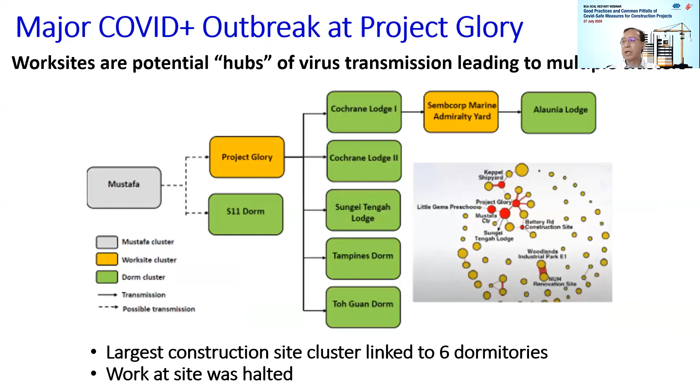As the BE sector restarts, we are reminded of the COVID risk posed by the workers' accommodation and worksite arrangement amongst various project parties. What happened at Project Glory is a case in point. At that time, when it became the largest construction site cluster, it was linked to 6 dormitories.

At this point in time, there is no vaccine or medicine for COVID, unfortunately. The only real protection is to implement safe management measures, SMM in short, and to contain any spread quickly when it happens. How well SMM are observed will be key to avoiding COVID outbreaks at work sites.

BCA has set up an audit and inspection team to check on effective implementation of the new measures at work sites and supply work premises, and to learn and share good practices quickly.

The key objectives are ensuring safe access, basically allowing only healthy and approved workers to work at site; achieving safe distancing by enforcing safe distancing, segregation and cohorting measures at work site; and providing containment by ensuring that COVID-positive and quarantine workers are isolated swiftly.

The builder and his subcontractors and workers play the most crucial role in keeping their worksite COVID-free. The key things for project parties to look out for are implementing a robust entry control system by implementing Safe Entry NRIC version, only allowing approved workers to enter the site, and ensuring that subcontractors and visitors do not mix with workers on site.

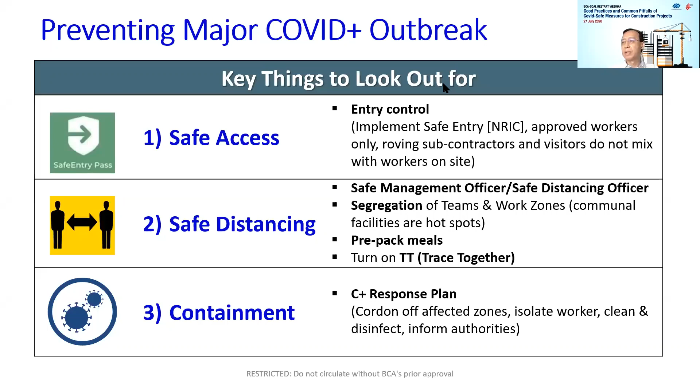Establishing a COVID-positive response plan which covers basically the following steps: cordoning off affected zones, isolating the workers, cleaning and disinfecting the affected zones, and informing relevant authorities.

In another more recent case, there was an outbreak caused by mixing of workers across work zones, common facilities, company transportations, and workers' residence. 6 COVID cases were first confirmed among an 8-man team working in the middle work zones of the project site. This later led to 356 close contact workers being quarantined.

Investigation shows that the main causes of the outbreak were workers from different work zones sharing common lunch and rest areas. Workers across the 3 work zones took the same company transportation to workers' residence, and workers from different work zones shared common residence and had social interaction.

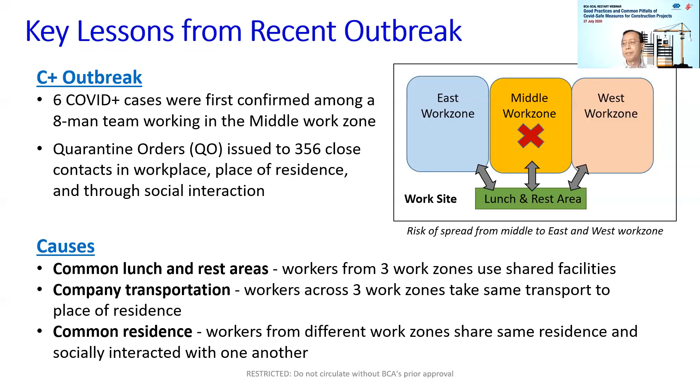The outbreak had a great impact on the project. MOH subsequently served a stop work order. The entire work site was closed and had to carry out thorough disinfection. The entire block of workers' residence was also locked down, with 77 workers conveyed to government quarantine facilities and 144 quarantined in situ.

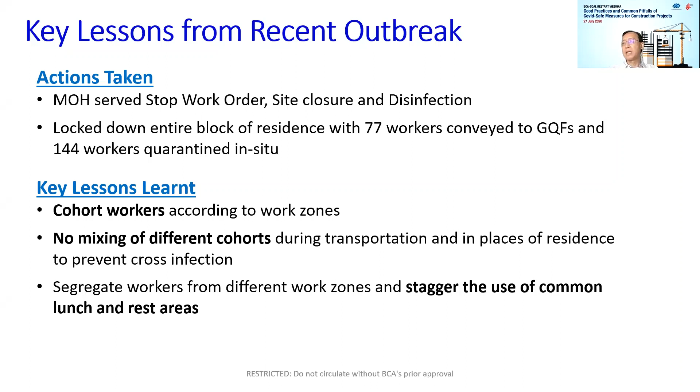The key lessons learned from this project are: firstly, builders should cohort workers according to work zones. There should not be any mixing of different cohorts during transportation and in places of residence to prevent cross-infection. Builders should segregate workers from different work zones and stagger the use of common lunch and rest areas.

Now I'll share on BCA's key audit findings from inspections carried out at work sites and supply work premises over the last 2 months.

Mismatch in entry records with BCA's approved whitelist; sites not installing the Safe Entry NRIC version; missing safe management measures monitoring plan on site; inadequate number of safe management officers and safe distancing officers found on site; sites not providing meals in individually packed form; and no isolated sick bays provided on site.

I will cover these non-compliances in more detail in my subsequent slides.

On mismatch in sites' entry records with BCA's approved whitelist, the main reasons are: SMO did not realize that workers were rejected; builders just submitted the updated personnel list to BCA, but it hasn't been approved; or builders added manpower to site to cope with the workers' shortfall, but did not actually submit the new list to BCA; builders submitted the new manpower to BCA, but did not include the previous approved list of personnel; and SMO did not know that they themselves and essential workers—Singaporeans, PRs, subcons—have to be included in the list.

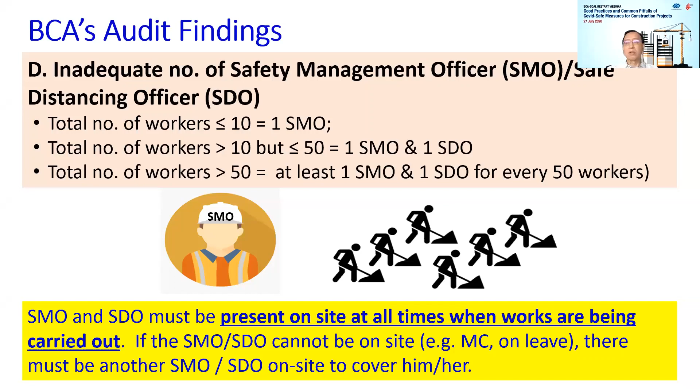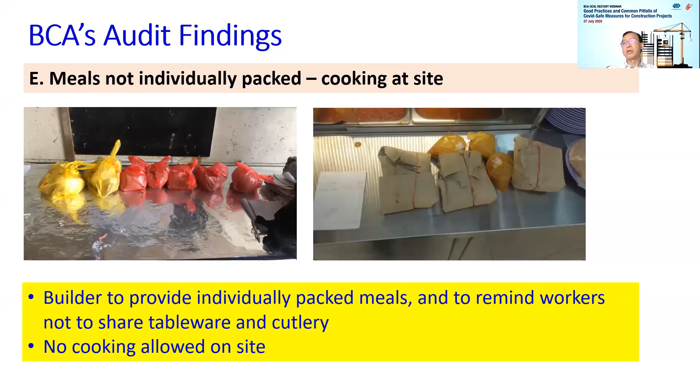Another key finding is the cooking of meals at site, mainly at sites with construction temporary quarters or temporary living quarters. Now, cooking is not allowed on site to ensure workers do not share meals, which increases the risk of contamination and spread of the virus.

The last key finding is the non-provision of a fully enclosed sick bay for the isolation of suspected COVID personnel from the healthy workers. Here are two examples of improper sick bays which do not serve the intent of isolating suspected C+ cases that we found during our audit.

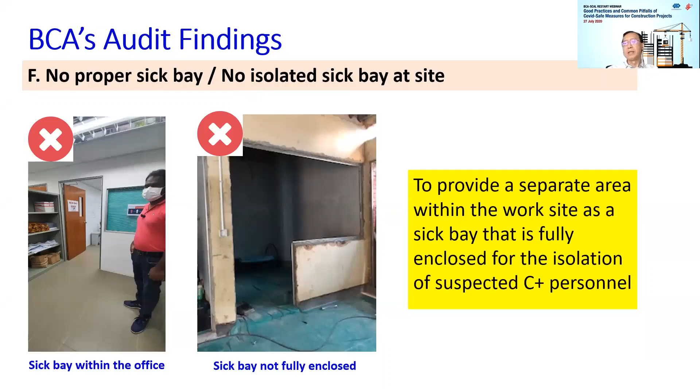Now, sites should only allow workers whose access code is green to work. All site personnel should install the latest TraceTogether app on their mobile devices, which will facilitate traceability in the event of a COVID-positive case. The Bluetooth has to be switched on at all times for TraceTogether to work.

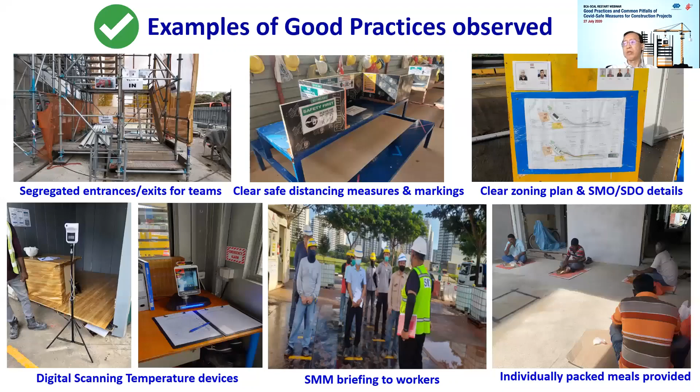Other good practices observed during site inspections include having staggered work hours and rest breaks to prevent mixing, SMOs using smart devices to track compliance on SMM, sites installing BCA feedback posters for whistleblowers to report SMM non-compliances, clear display of work zones to prevent mixing, sites using SafeEntry with NRIC to track entry of site personnel, and providing visual identifiers such as colored armbands and wristbands to prevent mixing.

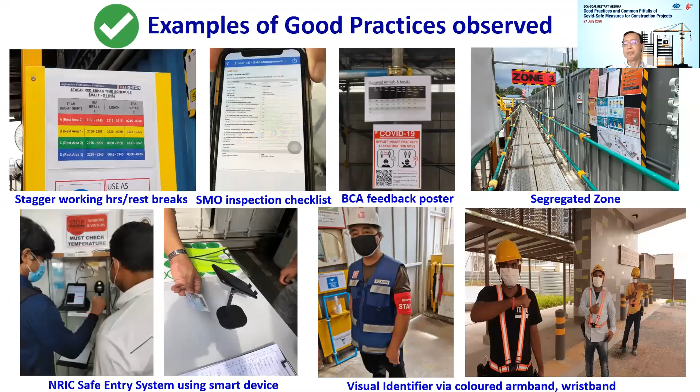Next, I'll share some common non-compliances observed at sites. Here are some images of non-compliances found during our site inspections, which are areas for improvement. You can see workers blatantly not wearing masks, and workers with access code red being allowed to enter the site. Another example is providing improper sick bays, which will not serve the intent of isolating COVID-positive or suspected cases. And cooking in a TLQ, which greatly increases the risk of contamination when workers share food. BCA will take enforcement actions against work sites that do not conform to SMM requirements.

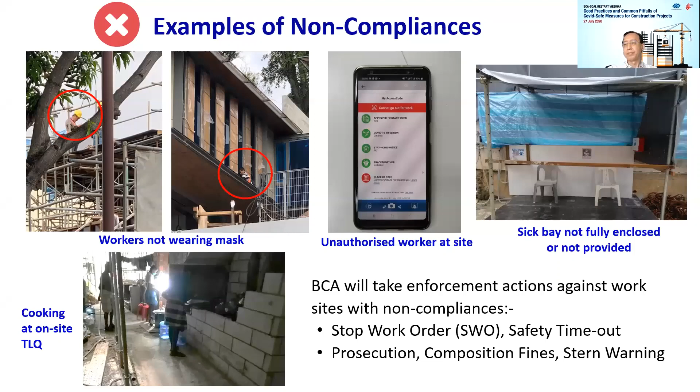Okay, with that, I've come to an end of my sharing. Thank you.

Thank you, Mr. Goh. Next, Mr. Goh Poh Khim, Executive Director of Koh Brothers Group, will be presenting one of their projects—construction of cut and cover tunnels at Marina Bay area for Circle Line 6—on their project planning and implementation of effective safe management measures on site. Mr. Goh, please.

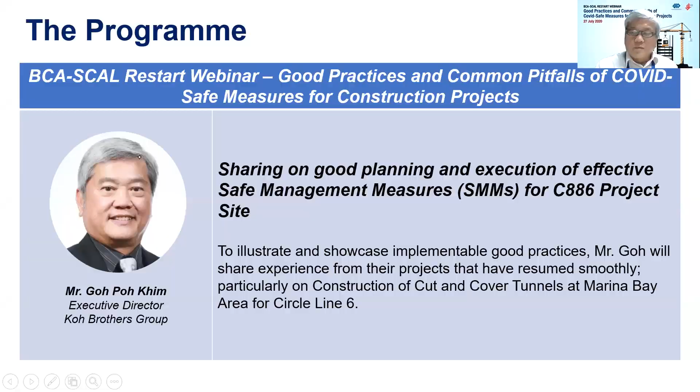Sharing on planning and execution of effective SMM on the C886 project site. A little bit on the project info and what guided us in our planning, the planned activities for each phase that we are doing, and of course the safe management plan on worksite, workforce, safe accommodation and transport, safe transportation, and the challenges ahead.

Background of the project: C886, construction of cut and cover tunnel at Marina Bay area for Circle Line 6. Our client is the Land Transport Authority. Location is at Marina Bay area. Contract sum is 225 million, and the contract period is up to 30th April 2025. The scope of work involves a tunnel of 832 meters, one escape building, ERSS system, diaphragm wall, DSMs, alternative strut and excavation, and alternative partial top-down construction. Others include obstruction removal, traffic diversion, decking, and utilities, etc.

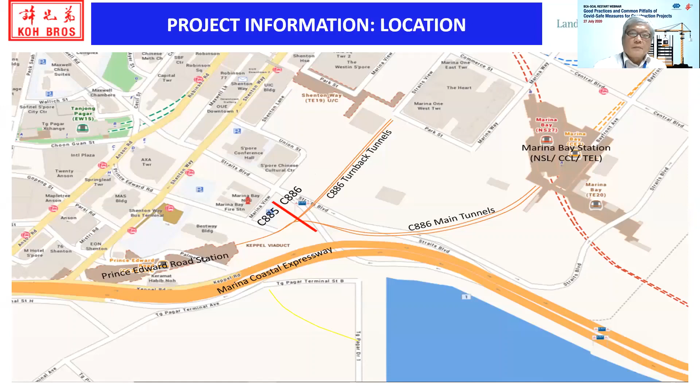The project location shows the turnback tunnel and the main tunnel here. Prominent landmarks include Marina Bay Fire Station on the left and Singapore Conference Hall nearby. The scope of works: diaphragm wall for the main tunnel and the turnback tunnel, about 2.2 kilometers, with excavation of 244,000 cubic meters. We have struts, RC works, and underground obstruction removal forming a significant portion of the scope of works.

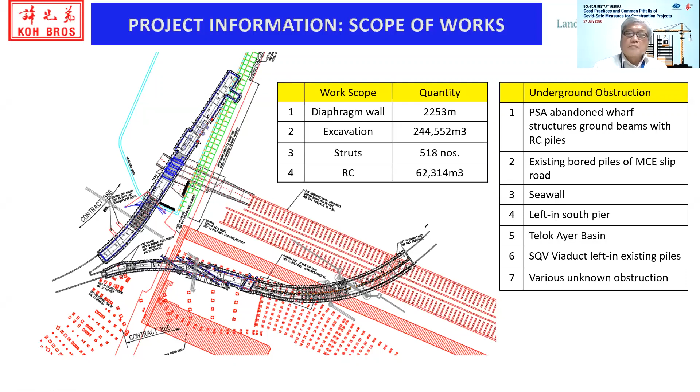Now our planning guide, what did we do? With the COVID pandemic in the background, we started off with a small step. We wanted to put a foot in the door first.

Pre-COVID workforce, we had 480 pax. Current approval is about 150, 30% of the original. Understanding the situation and various government advisories, we need to negotiate our way forward, understand how to move, how to adapt to the new normal. So we had a lot of guidance from client, LTA, and we pre-consulted with BCA for 2 weeks before submission.

Currently, we restarted and are applying to increase our workforce. We planned in phases, starting in phase 1 with a small step. We only had 2 teams of D-wall construction going on out of about 5 teams on site, for soil disposal and rebar fabrication. We used workers from our GSF as well as workers from TLQ. So it's a very small force. This is currently what we are doing now, the current stage.

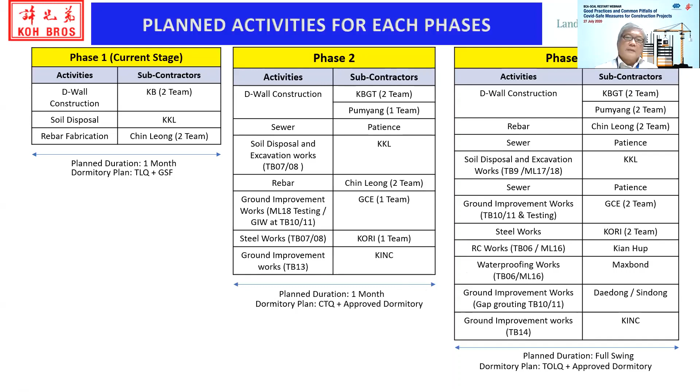And TOLQ, which is what we are applying for now. We have all the clearances already from all the agencies. We are just waiting for SLA to give us approval to move in. I think preferably we're trying to move in on the 1st of August. The TOLQ will house a capacity of 270 pax, and it is near the site, walking distance away.

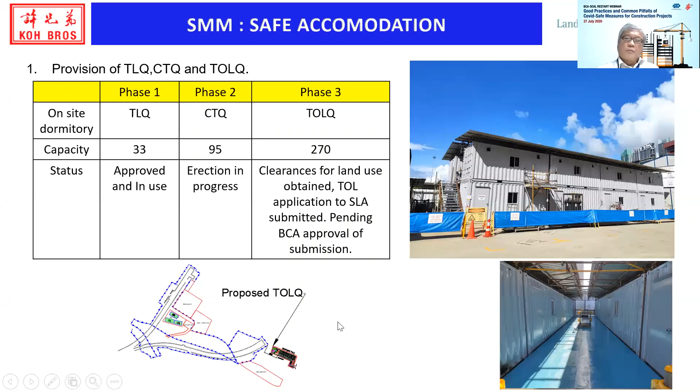Workers, like what Mr. Goh said earlier, in the same work zones must be segregated. Each team stays together within their own team. Earlier on, BCA allowed only 5 dormitories for workers, required for applications with more than 100 workers.

But now recently, with a circular on the 21st of July, there's no cap on the number of workers, but there is a limit of a maximum of 10 dormitory addresses. So this is what we are working on again now.

If you look at the table below, the workers' accommodation currently shows where our workers are: at GSF, Redhill Close, our TLQ, and fortunately we have our own FCD at G&W, and our subcontractors have their FCD also cleared. The table on the right shows Redhill Close, how we segregated the different teams into different rooms.

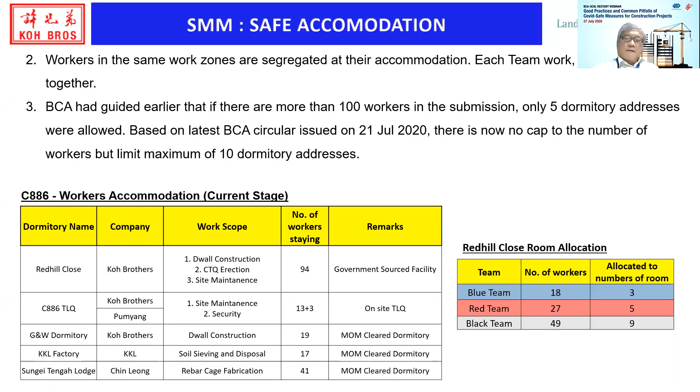Safe transportation, like what Mr. Goh said earlier, involves staggered arrival and departure times for each work zone. We have divided our workers into a few work zones, and the arrival of each work zone is at different locations.

So we use buses and lorries for our transportation. Each work zone will have their own separate transport, and transportation of our SP holders is by company van. Daily records of our transport arrangements are kept for contact tracing purposes.

Now, if you look at the transportation plan below, we have different colored teams for workers in day and night shifts. For the red day shift, 17 workers in a 40-seater bus. For the blue day shift, 11 workers also on a 40-seater bus. It's not up to capacity, but we have no choice—we have to segregate them in order to meet the COVID-safe measures implemented on site.

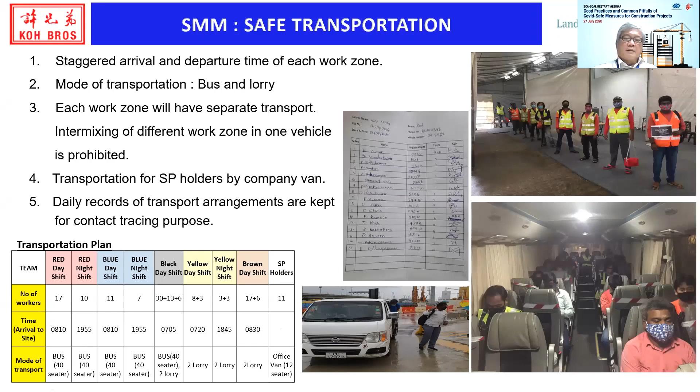The work site is divided into zones, and each zone is divided into teams. In zone B, we have D-wall construction with 2 teams, blue team and gray team. In zone C, we have rebar and soil disposal, handled by 2 different companies: Chin Leong for rebar, and KKL for soil disposal.

Now we are trying to increase our workforce with sewer coming in, strengthen or increase our workforce for D-wall construction, and increase activities for ground improvement as we approach.

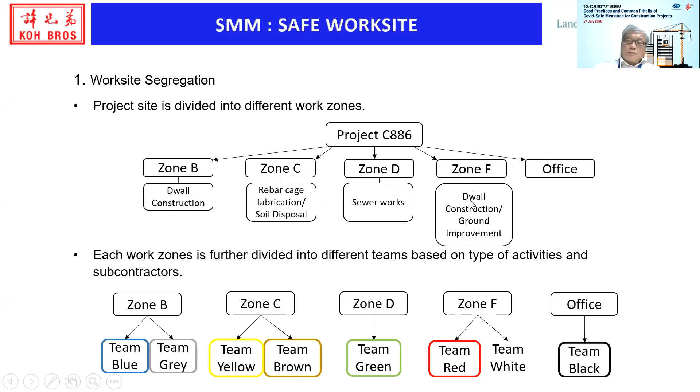This is how the work site looks when we segregated it between zones and color teams. They are all demarcated very clearly and separated on site by barriers so that there's no cross-contamination between teams in each zone. We have 3 drop-off points down here.

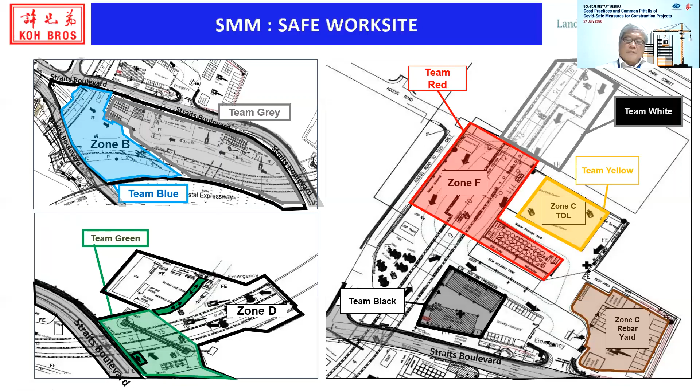Facilities provided at each work zone include a dedicated rest area, water point, toilets, and containers for site staff and supervisory staff, who can only stay in their respective zone and are not allowed back into the office area. We also have sick bay and isolated room containers prepared for each different work zone in case of emergencies.

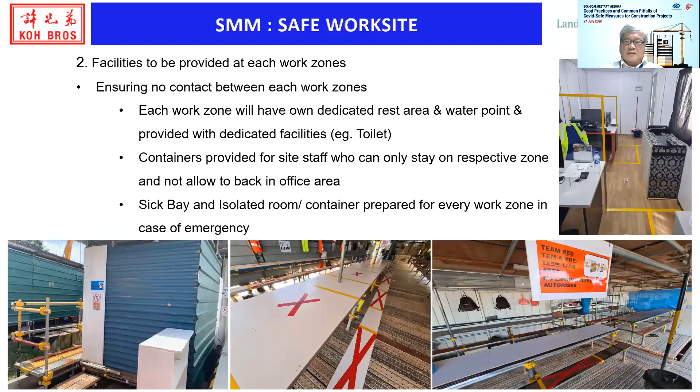For entry and exit, we have a safe entry NRIC system at every entrance of the work site. Like I said, we have 3 drop-off zones, so we have 3 NRIC systems for safe entry.

Additionally, we have QR codes to record workers' health before entering the site and before entering different work zones. Before they enter a work zone, they scan their QR codes so they can be monitored as to which work zone they are allowed in. Every zone is also provided with sanitizers and insect repellent.

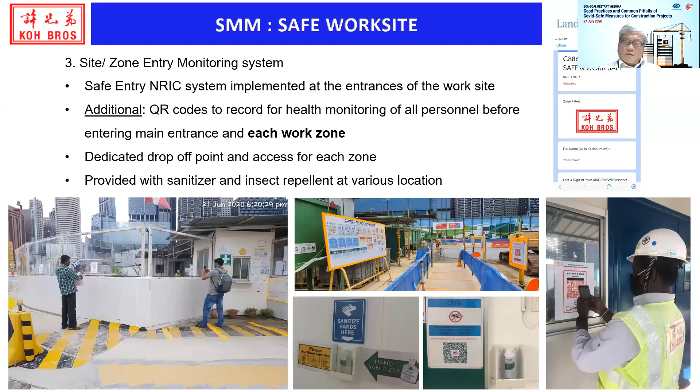As for how we identify the teams: our vests come in different colors - red, yellow, black, green. This is how we identify the teams on site and the work zone they work in. So if red is in one zone, they will not cross into another zone. We also identify them by their helmets.

Transient daily workers are those staying outside the work site when they come in. We differentiate workers staying in TLQ by stripes on site.

We have staggered working hours, lunch breaks, and rest hours for the workers in each zone and the different teams involved, plus pre-packed delivery of food. Ignore this guy, he's the driver.

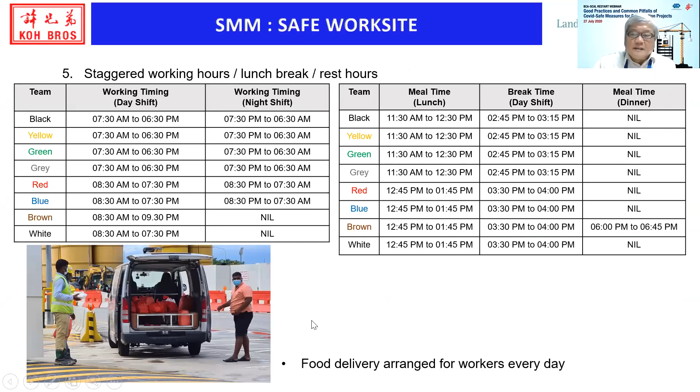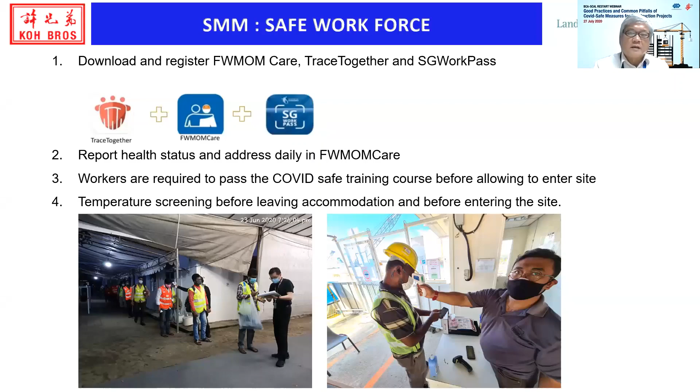Now the challenges that we face. We were given approval for restart on the 27th of May.

After consultation with BCA and guidance from our client LTA, approval was given on the 15th of June for resumption of work on site once COVID-safe compliance measures were submitted and approved.

I believe some of us have had this experience before - workers' access codes were still red and not green. Finally, 5 days later, we turned green. Everyone was relieved and work got started.

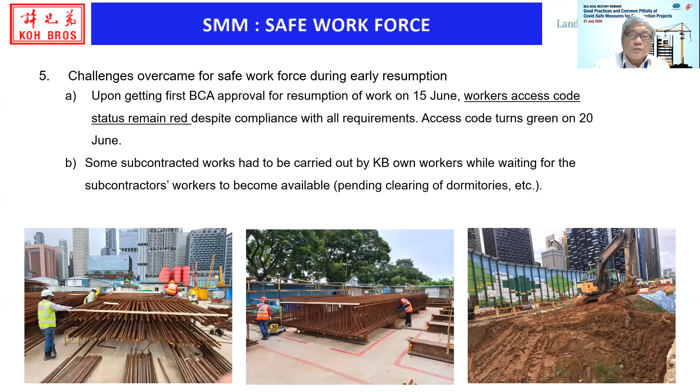Some subcontracted works had to be carried out on our own while waiting for the subcontractors' workers to become available, pending the clearing of their dormitories. I think with this one we have no choice but to act fast.

Our SMOs and SDOs are identified with armbands, clearly identifiable, giving daily reminders to workers on safe management measures in pre-task talks, just like our toolbox meeting when we talk about safety. We remind workers on safe distancing, maintaining good hygiene, washing hands, temperature reporting, MOM Care, and to report to their immediate supervisor when sick or unwell.

This is very important. We have 2 SMOs on site, 8 work zones, a current workforce of 156, and 8 SDOs on site.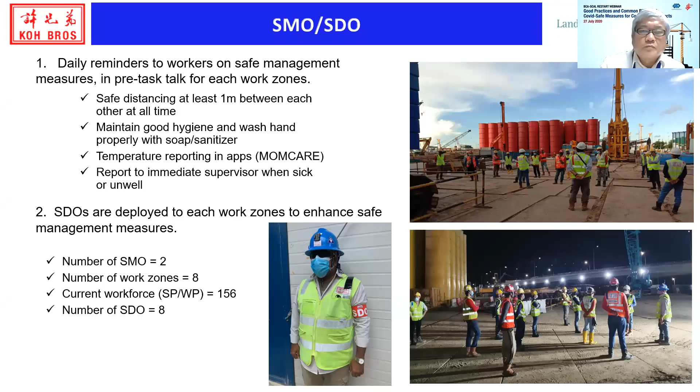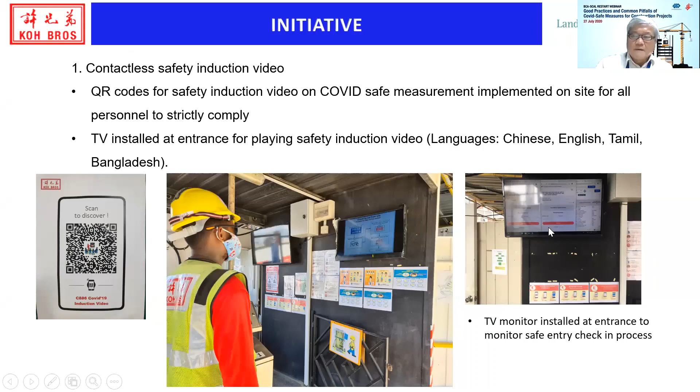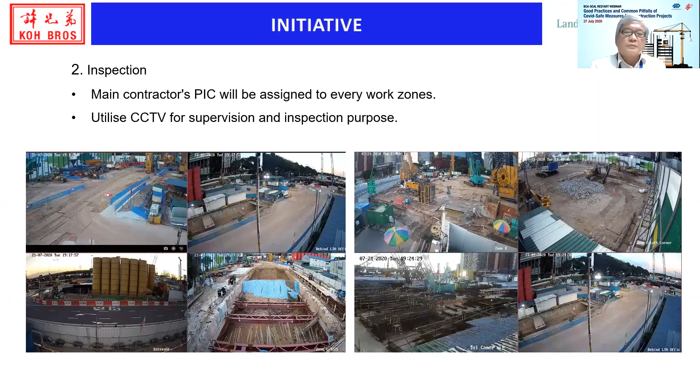Inspection - we have PICs assigned to every work zone. We utilize CCTV for supervision and inspection for COVID safe measures - no bunching, no crowding, no safe distancing violations are being observed. This is what we are doing now. Temperature screening, blood oxygen, and heart rate monitoring for TLQ workers. This is also quite common in many sites now.

Now the challenges ahead. Although we could start, the process is still very slow. Koh Brothers has started physical work at 6 of 7 projects. Productivity has dropped to only about 20% of pre-COVID levels. We're trying to adapt and adjust to the new normal. Increased cost and time due to additional COVID measures and the drop in productivity. It's just a long and winding road ahead.

It's unprecedented and uncharted waters ahead. We need to work with our clients, stay focused, engage with authorities, BCA and SCAL, to negotiate our way forward and adapt and adjust to the new normal. Hopefully, like I said, hopefully we will get back to pre-COVID levels soon. And it's just a hope. Thank you and stay safe.

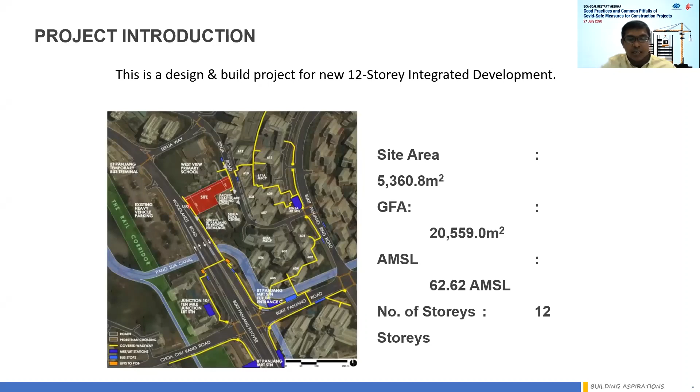Let me start by introducing the project. It is a design and build of a 12-story integrated development at Woodlands Road. For this project, the main difficulty faced was the manpower needed to restart, as most of the workers are housed in dormitories that are under isolation or COVID clusters. Also, unlike some typical work sites where there are TLQs in their premises, this project didn't have that privilege, which made it tough for the site to restart.

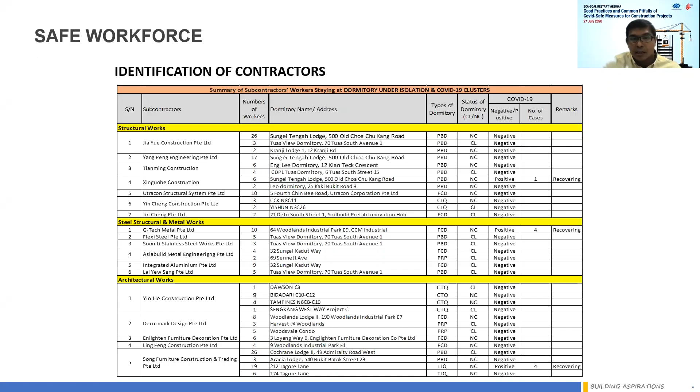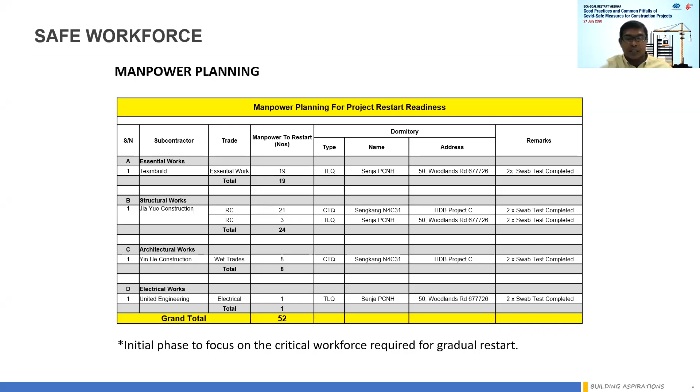Therefore, the project team had to thoroughly plan and identify the contractors and their housing accommodations, and also construct a TLQ within the premises in order to gradually start. The site team put in weeks of working and planning closely with our subcontractors to ensure proper cohorting at their housing locations. From this, we were able to identify the critical works required for gradual restart.

After the gradual restart planning and identifying the critical workforce required, the next step is the pre-screen requirements as part of the safe management measures implementation at the site. Let me share a short video of the safe entry process. Please enjoy the video.

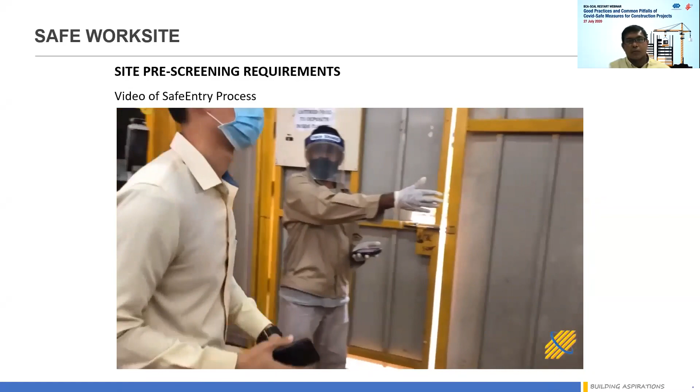Next, everyone entering the site is required to attend the COVID-safe induction course, where they are briefed on the in-house rules and regulations - for example, not to share food, not to enter unauthorized areas, worker segregation, and the work allocation plan, where they do not cross into other work zones and intermix.

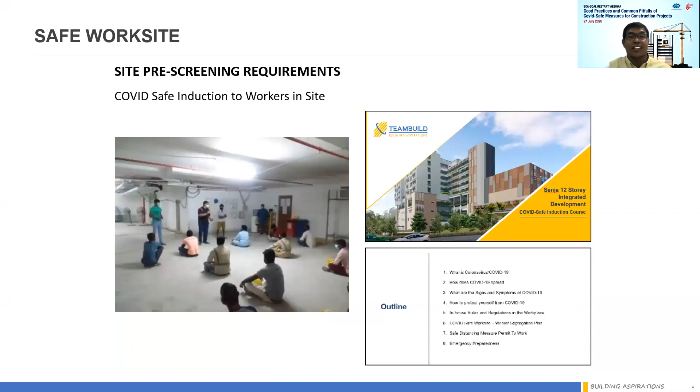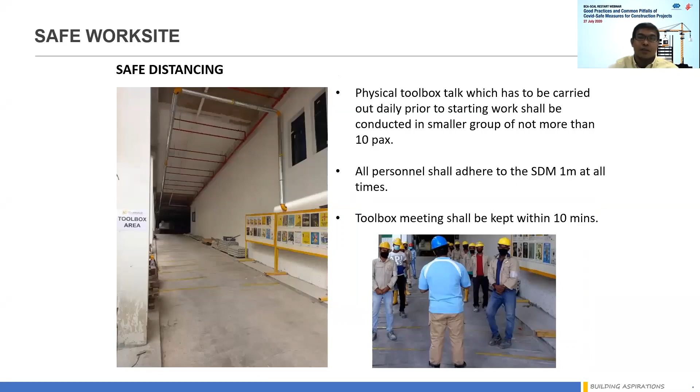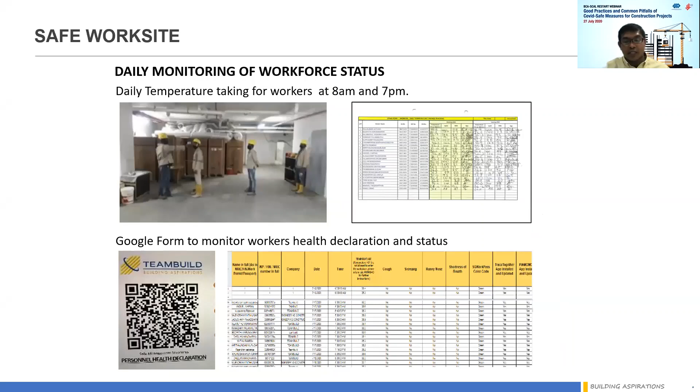Toolbox meeting areas are allocated and meetings are conducted in smaller groups of 10 persons, capped within 10 minutes. Daily monitoring of workers' temperature is recorded at 8 a.m. and 7 p.m. respectively. Google Forms are also implemented in individual TLQ rooms, where workers' temperature is recorded along with whether they are feeling unwell. This information can be retrieved instantly online.

Visitors entering the site are also required to complete a declaration. Details required are company name, purpose of visit, and whether they have been overseas or come in close contact with anyone showing COVID symptoms. All these records can also be retrieved instantly and monitored daily.

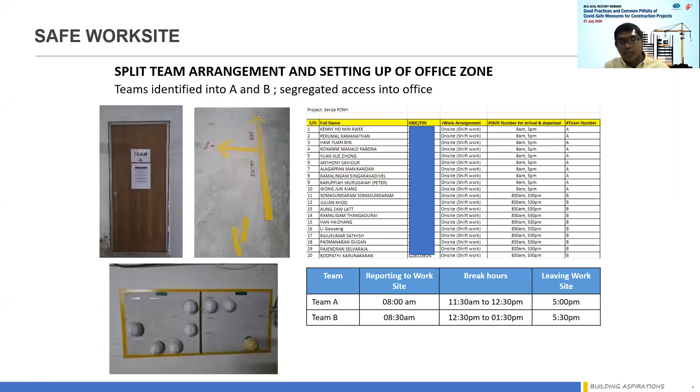As part of SMM implementation, site teams are also split into two teams, Team A and B, with allocated reporting times, meal times, and leaving times, and separated office entrances. To prevent intermixing of different trades, trades are given different colored armbands with their company name. Access is also segregated - for example, the architectural trade uses the stairs, while the structural trade uses the PM hoist.

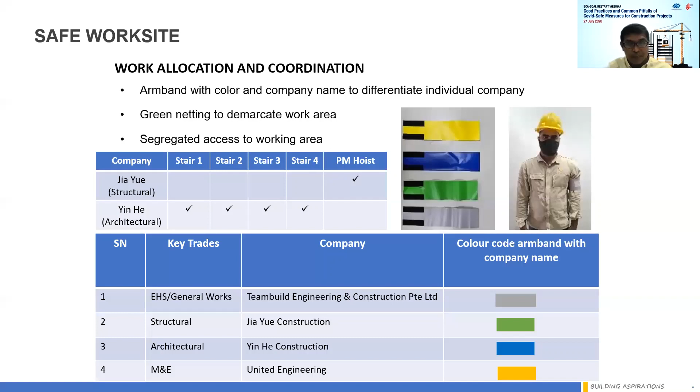For this project, I've also implemented a permit to work as part of the safe management measures, where the SDOs from different trades are required to fill up a simple Google form on top of the pre-work allocation planning done the day before.

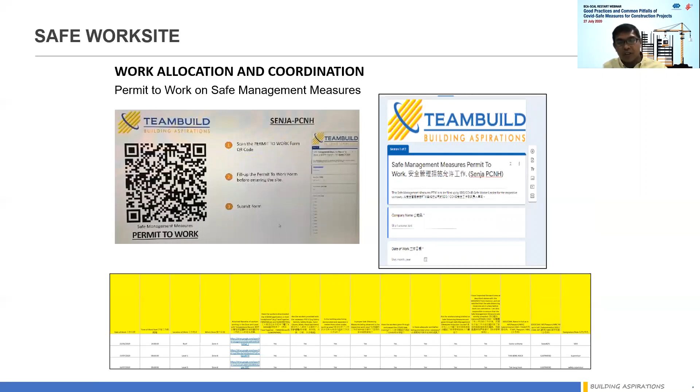So what is this permit to work system, and how does it help in monitoring? Some critical questions required in the permit to work include location of work, work zone, company name, and the name list of workers working in that particular location. This makes monitoring easier as it can be retrieved just from your mobile phone, and also helps identify and ensure that the correct team of workers are working in the correct locations.

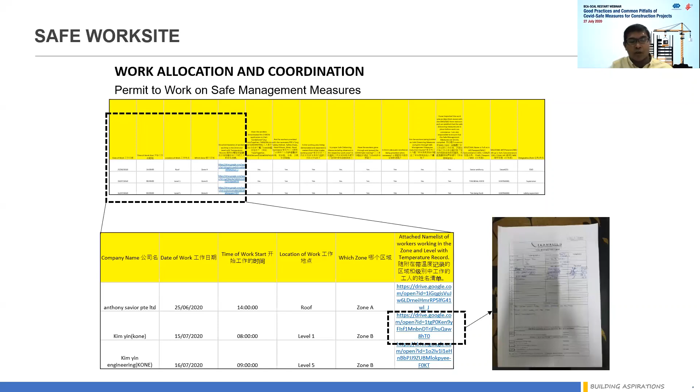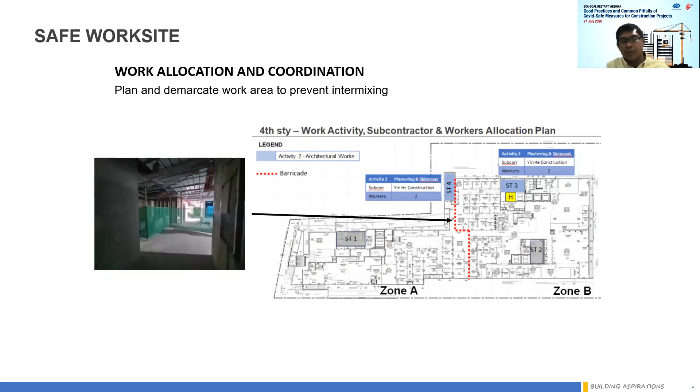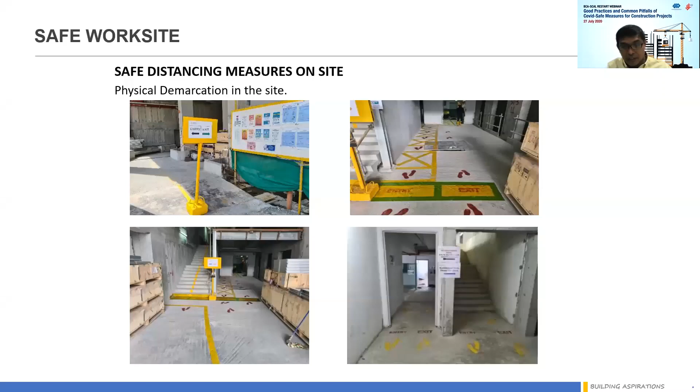As our project team planned, our site is separated into 2 zones, A and B, demarcated by green netting. Some physical implementations include signages to raise awareness among workers and visitors, including exit and entry points, signages to prevent unauthorized entry into CTQ areas, and safe distance measures for PM hoists.

How do we enforce to ensure that safe distance measures are promptly adhered to? By doing daily inspections by SMO, SDO, using iSafe, a handheld digital device focused on SMM, where the SMO or SDO can record and even take photos of good practices or violations observed.

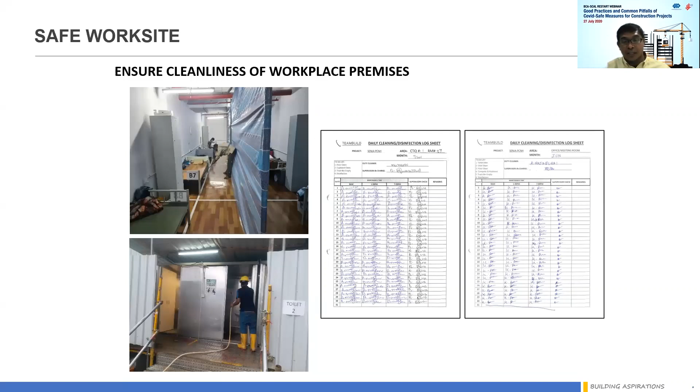Cleanliness of the workplace is also done regularly. For my site, we actually do it 3 times a day. Log sheets are also available, so after cleaning, the allocated cleaner will sign and it's countersigned by the SDO.

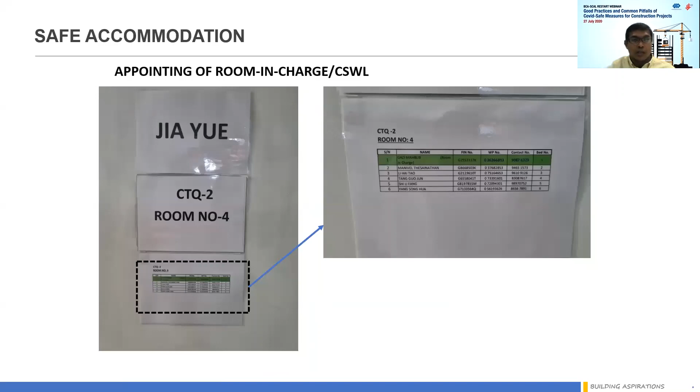A COVID safe worker leader is appointed for every room. Their role is to ensure the 3 apps are updated, ensure workers take their daily temperature, ensure masks are worn at all times, and no intermixing within the quarters. They also inform the SDO of any non-compliance observed.

After monitoring the access code, whether it's green or red, the summary is recorded daily.

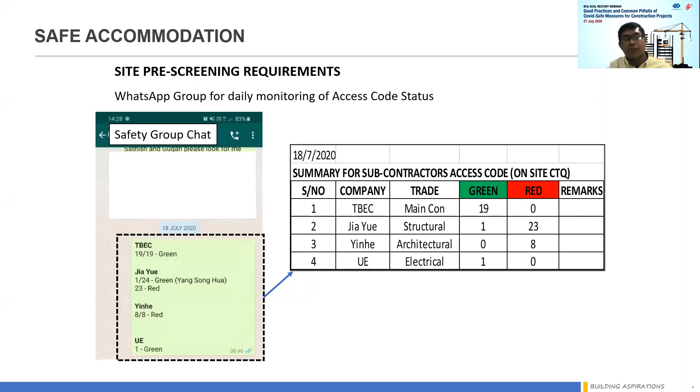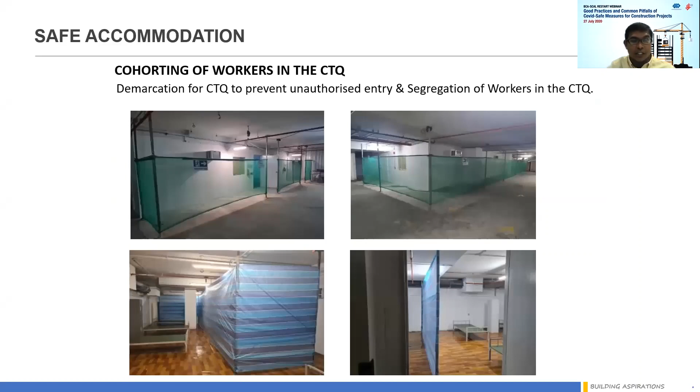Demarcation of the CTQs is implemented to ensure there is no unauthorized entry into the CTQs, and the rooms are also segregated. Isolation rooms and sick bays are provided and demarcated. Separation of toilet facilities for common usage and isolation rooms, with dedicated toilets, and hand wash is also provided for all toilet facilities.

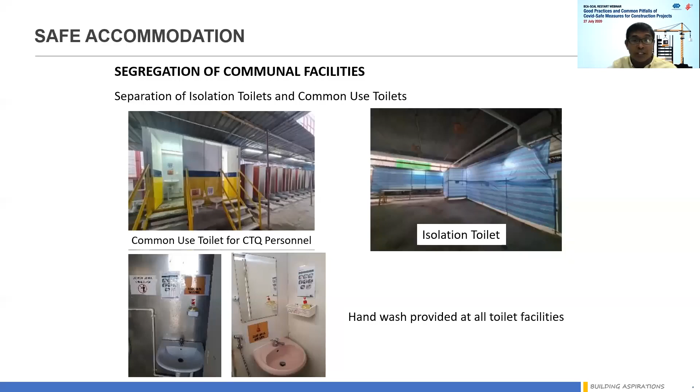Scheduled timings for the shower facilities are provided for different teams staying in the CTQ. These are briefed to the workers during the COVID safe induction and displayed in every room.

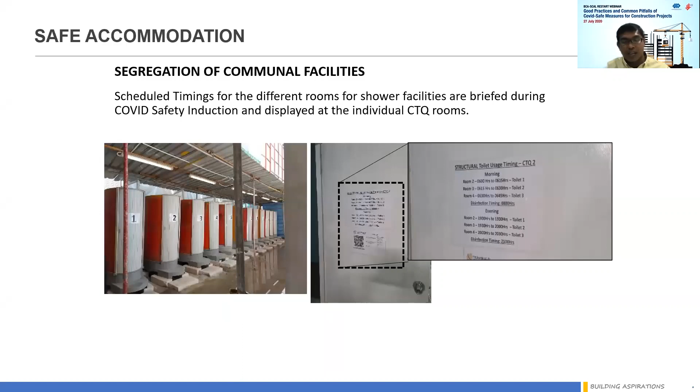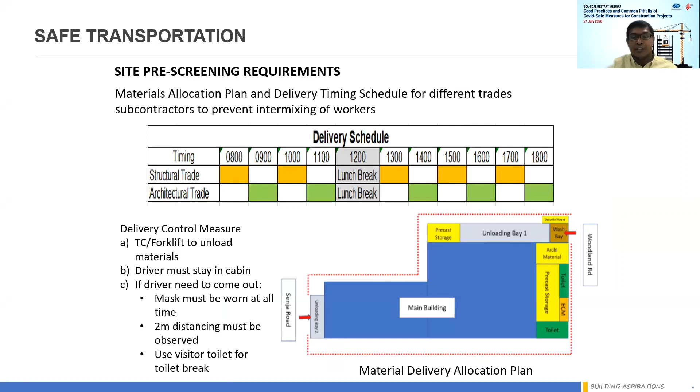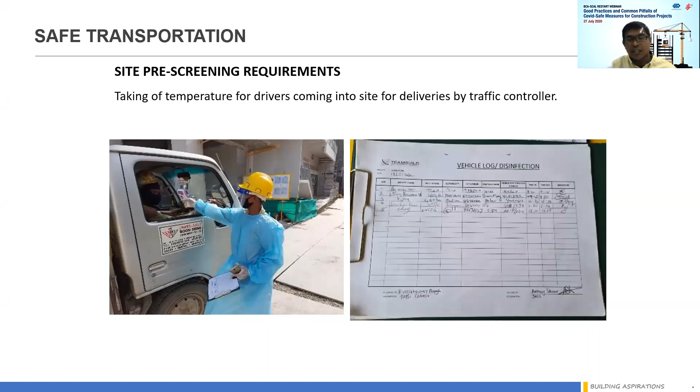As work begins, we also plan and implement a delivery schedule and material allocation to prevent any intermixing of the different trades. Drivers entering the site go through the process of scanning the safe entry NRIC via Trace Together, taking temperature, and registering in the vehicle logs. All records are properly kept.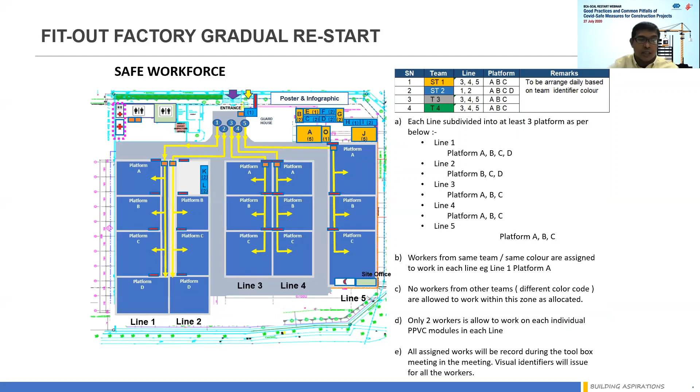As this is a PPVC project, let me share on our fit-out yard gradual restart. Planning for the gradual restart in the fit-out yard is just as important as the site, so that production can begin and be delivered in a smooth manner without compromising on the chances of close contact within the yard.

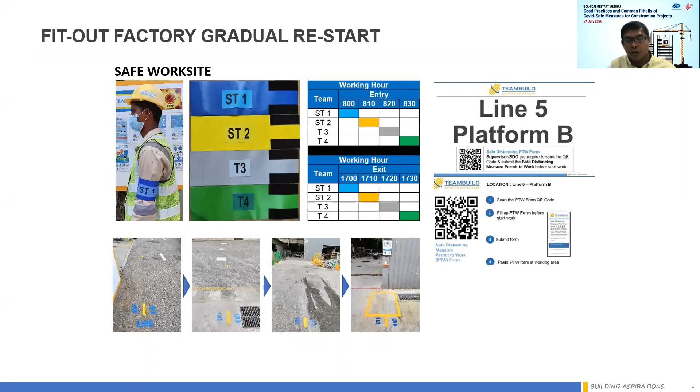Teams are identified with color armbands representing the production area where workers will be demarcated to work, to prevent any intermixing. Although the fit-out factory is in a controlled environment, we still pay special attention to the control of movement within the factory itself.

We built a TLQ to ensure dedicated accommodation for the fit-out yard, which is also our main workforce. This planning comes hand in hand with our main project to ensure sufficient resources are allocated. Demarcation and dedicated toilet facilities are being enforced by SMO on a daily basis.

The latest initiative by TeamBuild embraces technology to enhance safe measures compliance. Data and analytical technology is being incorporated into CCTV. Please enjoy the video.

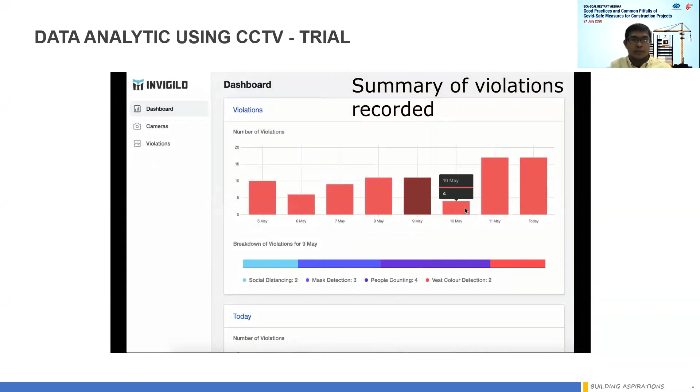Lastly, thank you for your time. Let me end the presentation with a quote from our CEO, Mr. Xiao Seng Hui: If we work together as a team, we will be able to ride through this challenging period and emerge stronger. Thank you.

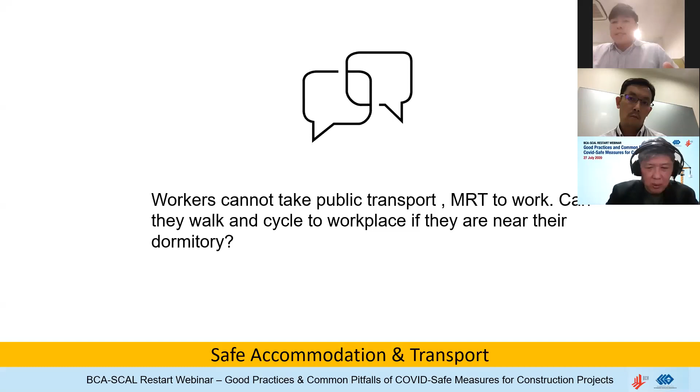Okay, back to Vivian.